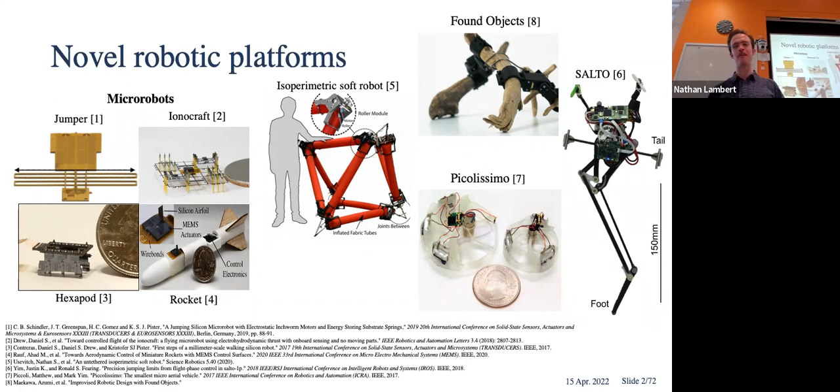I'll talk about a few robots, but the ones on the left here are a bunch of micro robots from Kris's group, whether it's a jumping robot, a walking robot, and the Ionocraft, which I spent a lot of time on, which uses high voltage to generate an ion thruster, which is very fun.

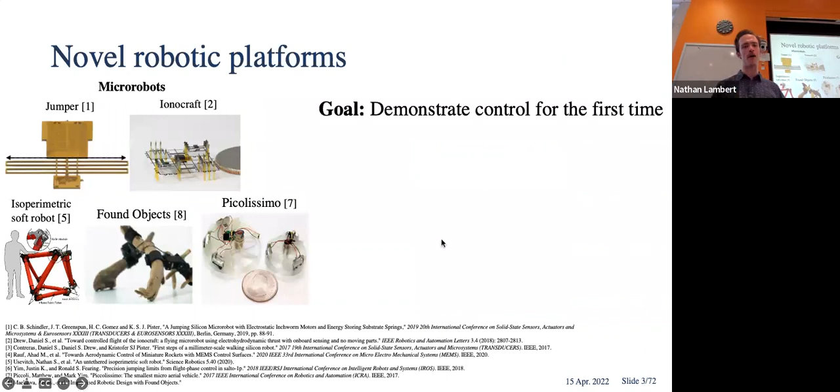There's some characteristics about novel robotic platforms that make generating controllers more difficult, or at least different. When you're trying to demonstrate control for the first time, this is a really different control problem, where what you have is you really don't know the system that you're studying that well. So you don't have a strong prior on the dynamics, and that makes it so that you're not really going to be able to simulate the system as much.

And then, as I've said, there's a high cost per test because I have to spend 2 hours over a microscope to actually assemble this before I get to test it. So there's a lot of frustration when you break these things in silly ways, but that's bound to happen.

So to mirror this, the solution that we're looking for needs to have a couple of properties: it needs to manage changing or uncertain dynamics, so it needs to be able to generalize across a spectrum of dynamics that these robots can take on, and then be extremely sample efficient. So what little data that we have, we need to actually be able to use that to generate a controller.

To take this into the video that I started with, I showed up and was given this wildly exciting video of an open-loop flight of the Ionocraft, where you can see that it is pushing itself into these wires. It's amazing that it lands upright, and this was more than enough to get a paper accepted at the time. And I'm left with these properties and left to think about, okay, how do we actually generate a controller for these robots?

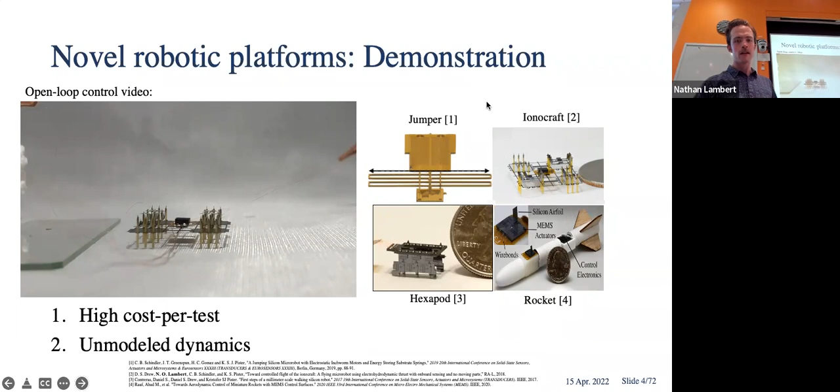As an electrical engineering student, I'm like, okay, there's a whole spectrum of things that we can try to do, and they encompass things like system identification with state space methods coming straight out of linear systems, or even just trying to incorporate some prior of the dynamics into doing PID tuning, which is what people do in the real world. It seems like we should be able to make that work.

Then some exciting things I was starting to hear about, in this reinforcement learning area, are model-based RL and model-free RL, which are kind of trial and error learning and incorporating that understanding to learn about the environment over time. You can break down these methods into different classes, model-based or model-free, whether or not you're learning a transition model of the environment as part of the process. There are analytical methods where you're trying to actually write down equations for the world and use that to solve them, and then there are these iterative methods that are data-driven and don't require hand engineering to actually get a solution.

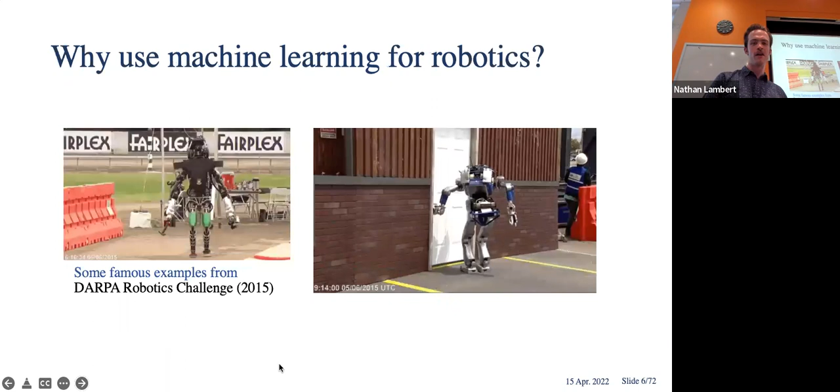So the first motivating question I had to ask myself is, why may we want to use machine learning for control, and what is missing from existing practices in robotics? Something that I've come back to a lot now is that these robots generally lack the ability to really generalize in uncertain environments. You could engineer them in a lab, but the failures that we're seeing are just, we can't take that one step further.

And I want to see robots that can incorporate what they're seeing in real time to become more intelligent and solve these tasks that ostensibly look simple.

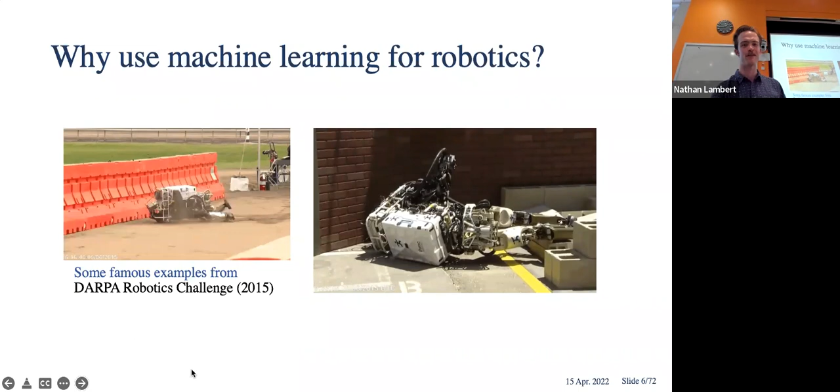So once we sold ourselves on using machine learning, which is easy to do in 2018 given everything you're hearing at Berkeley, it came down to the question of why would we use a model-based method or a model-free method?

Generally there's a set of trade-offs between incorporating a structured knowledge of the world versus not, and that's reflected in the controller you're going to generate. Model-based methods are known to be sample efficient and able to generalize across the dynamics your robot can encounter, but they're a bit harder to implement in terms of engineering needed, and pretty computationally intensive to use.

While model-free methods generate policies that are tough to actually interpret, they use more data to get there. But the process of doing that has been relatively refined, so more people are doing out-of-the-box applications of model-free RL just because the code is a bit easier to use and has had more successes.

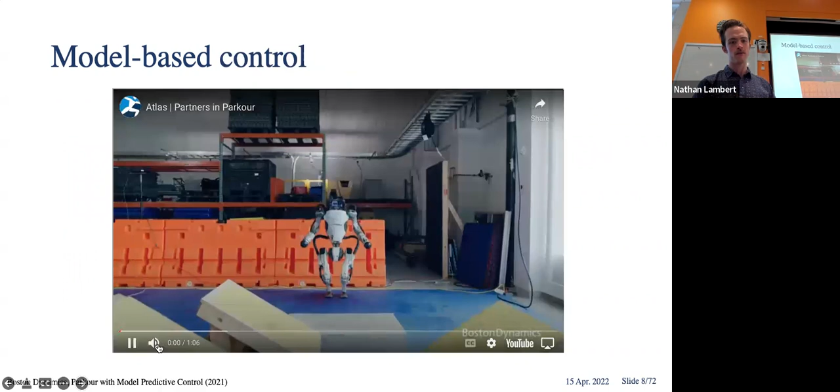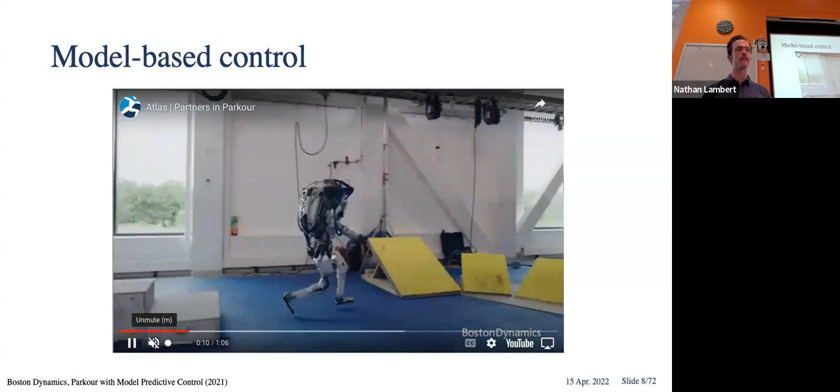But there's really a lot of compelling reasons to try to reach for model-based methods. One that I've been looking at more recently is that if you look at what Boston Dynamics is doing, this is purely model-based control in a certain environment. Mostly what I'm interested in doing is transitioning this model-based control to then handle the uncertainty of the real world, so we can get the best of both worlds - robots that have this type of behavior, but in environments they're encountering for the first time.

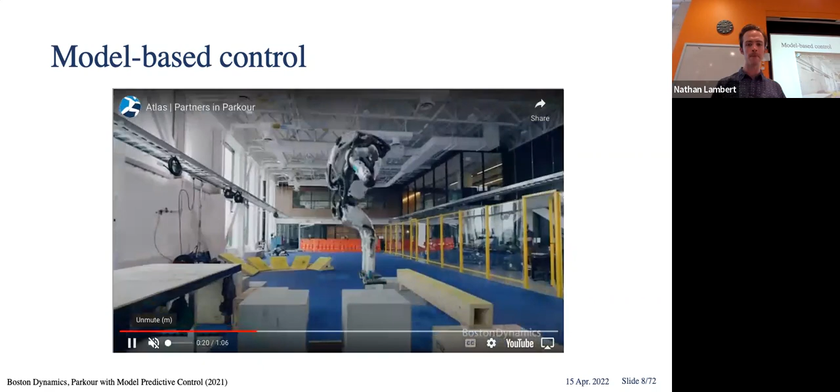So to backtrack some of my logic from now onto the decisions I made during my PhD, we converged on this topic of model-based reinforcement learning, which is an iterative framework of trial and error learning where we're learning a structured model of the dynamics as the agent improves.

So while the agent is acting in the world, it acts in the environment following some policy or some control law. By taking those actions, it collects a bunch of data. With that data, it learns a model of the dynamics. The equation shown here is maximizing the log likelihood of a learned model to try to fit a distribution to the transitions that we have.

And once you have a model, you can then use that to plan actions in some way to maximize rewards. So this optimization shown here is just a finite horizon where we're choosing the best action to maximize reward. I'll talk about next what that framework actually looks like and what you might need to Google if you want to actually try to implement this approach.

So I've started by motivating model-based RL, and I'm going to then go a little bit deeper into a method that I used at length in my PhD, an example for actually controlling a robot, and then some more theoretical contributions to the field.

So if we have a dynamics model, we can formulate predictions like here. We can take the current state, add some delta state or some one-step transition from the current state with the learned model, and get the next state. And the question is, how do we predict further into the future? Because most of the tasks we want to solve are more than one step in the future.

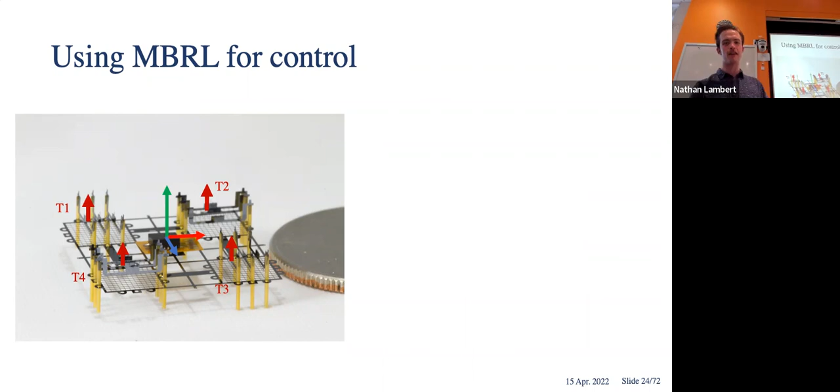And we went off and got a commercially available, very small quad rotor called the Crazyflie. It has the same IMU on board, has 4 thrusters. It's like, okay, this is a very conceptual match to what we're trying to do.

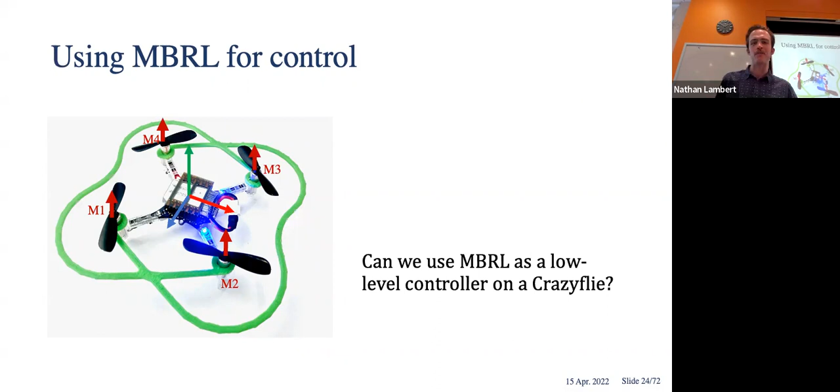So we set up a learning system where we were applying direct low-level controls to try to create a stability controller. So we weren't looking at trajectories, we just wanted to not crash a quad rotor. The task was to minimize pitch and roll, so kind of keep it flat in the air.

To do so, we read the onboard state values from an accelerometer. An accelerometer will give you orientation in space and accelerations in terms of rotation or side-to-side acceleration. In order to control that, we sent direct motor voltages to these propellers here. We wanted to know, can we just replace these internal controllers? We had turned the PID controllers off.

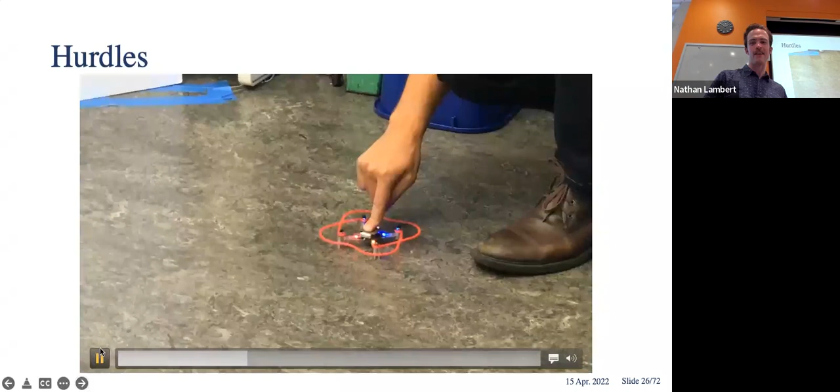Starting from this vision, there was a long journey into seeing if this actually worked. So this is one of my first additions from the normal job talk - we were stuck comparing to random controllers for a really long time. We spent like a month doing things like this and seeing if it actually worked.

There's a lot of interesting things about quad rotors I could talk about, but essentially the ground effect - if you have a quad rotor close to the ground, the force will create like a cushion underneath it. So it'll kind of always look like it's doing decent no matter what you tell it to do.

So the next step was really to just launch this thing into the air. We made it apply max force for a few seconds to get up and then see what happened. The learning process is really different from there, but there's definitely a lot of hurdles to get to this point - there's just a little bit more force in these videos to get it off the ground. It looks honestly the same now that I have them back to back.

But what happens is that over time, it both gets itself higher in the air and then learns to control itself. You can see in this video that I've watched many times that there's a lot of drift. That's because we're really only trying to not flip over the quad rotor. And this was a really exciting thing to actually have one of the better flights on video.

The other cool mode was that it figured out it wouldn't flip over if it just used a lot of thrust, and it would go crash into one of these ceilings, and then I would catch it before it hit the ground and I had to start over, which is fun.

So I was one of the few people to actually start doing reinforcement learning work in the real world. On one hand, I wouldn't recommend it, but I think that it also makes you actually learn how to do things, and some people don't do that much now.

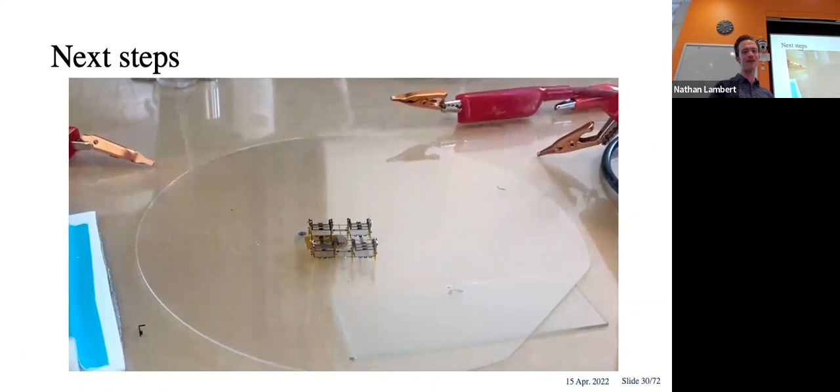And I got a couple of Ionocrafts assembled. This was one. This is how a couple hours of my life ended, which was good. For anyone that doesn't know, it's not supposed to be like that. We want it to fly, but I was happy digging this photo up, which was pretty funny.

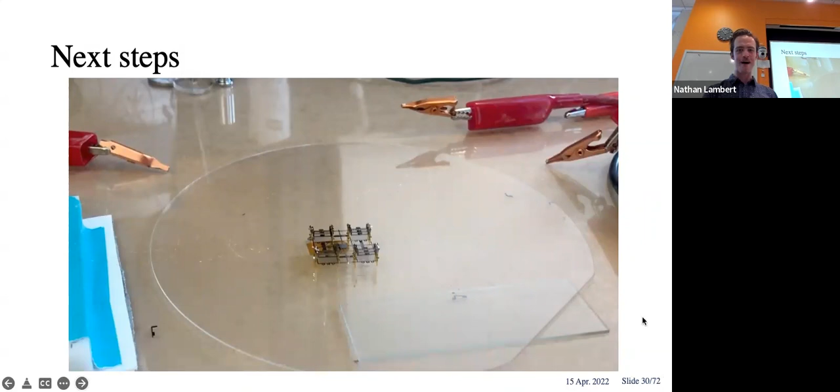And that's as far as we got to trying to use some sort of model-based RL to actually control the Ionocraft. But I think then I went off and did an internship, and there were other factors that made me not come back to this. But this is a cool video.

This robot is using like 2000 volts to generate ions moving through the air and hover completely silently. So I'm just going to take my moment to watch that again.

Okay, so this is all kind of where the talk will transition out of talking about robotics and more into this work that I've done in model-based reinforcement learning. And it's around this issue that we call objective mismatch.

So I've talked about a certain linkage, or lack of link, between the accuracy of the model and the performance. And if you're trying to learn a dynamics model for control, your intuition is that those are going to be closely linked.

And what you're going to be looking at in practice is that you'll do something like maximizing the log likelihood, which is a metric for if you're learning a distribution of transitions, and you'll want to see that your episode reward, so the cumulative reward that your agent receives, is actually maximized. You want to see if these are correlated. And in practice, we've shown that it's definitely complicated.